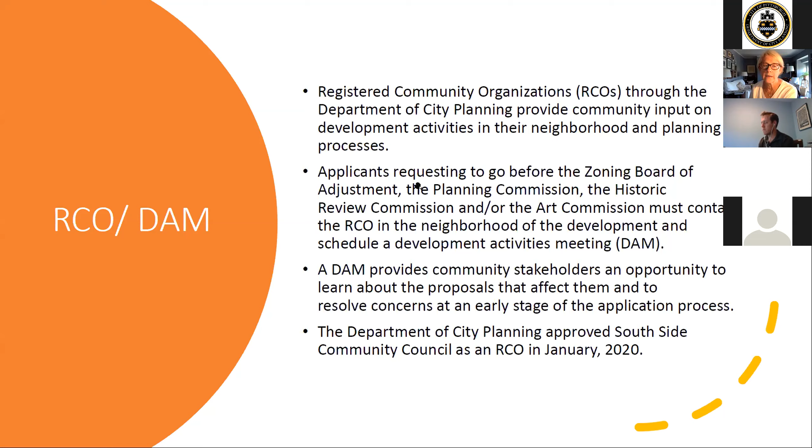Two of our city planners are with us today, Anthony Kobach, who will be documenting the meeting, and his colleague Stephanie Joy Everett, who is the meeting host. We'll hear from Stephanie a little later regarding the logistics. Anthony will now share when dams are necessary.

Thanks, Barbara. At the top it says a public hearing—it's one of the commission meetings, and in this case for these projects today, the Historic Review Commission, the Zoning Board of Adjustment, and the Planning Commission are the 3 types of public hearings that would trigger or require a development activity meeting. But it takes one more step: the public hearing plus one of the project thresholds.

You see the long list of potential developments that would trigger this. I want to at least take your eyes to the last 2, which is basically any project of any size or scale that is going to Historic Review Commission would also trigger a dam, as well as Art Commission.

But for the other projects and other commissions, you would actually have to have some sense of a significant size to the project. So very, very small projects would not trigger that, because the mindset is that these are smaller projects with less impact or significance in the neighborhood. But you'll see like 4 units or more residential units.

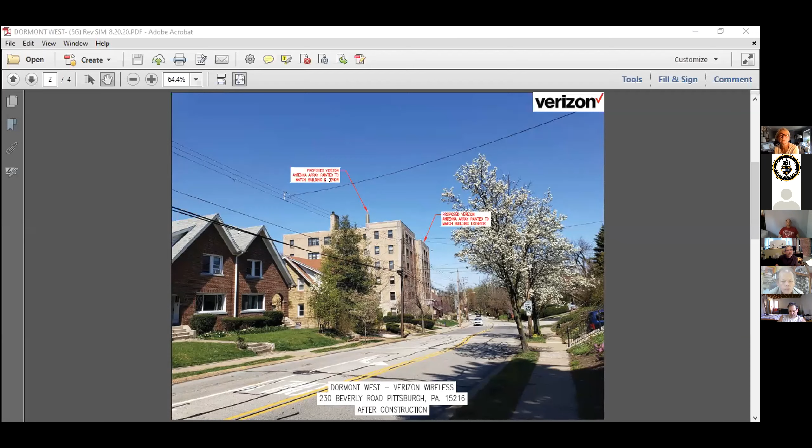And there you go. So this is the building that we're proposing on at 230 Beverly Road in Dormont. Actually, it's Mount Lebanon, it's Mount Lebanon borough or municipality of Mount Lebanon. This is the canister I was referring to. I could see if I can kind of blow that up a little bit, where it would kind of look just like a chimney, a stack of some sort sticking up out of the roof. There it is without it, and there it is with it. That's what we're going to be proposing for our rear sector on the building at 1700 Carson.

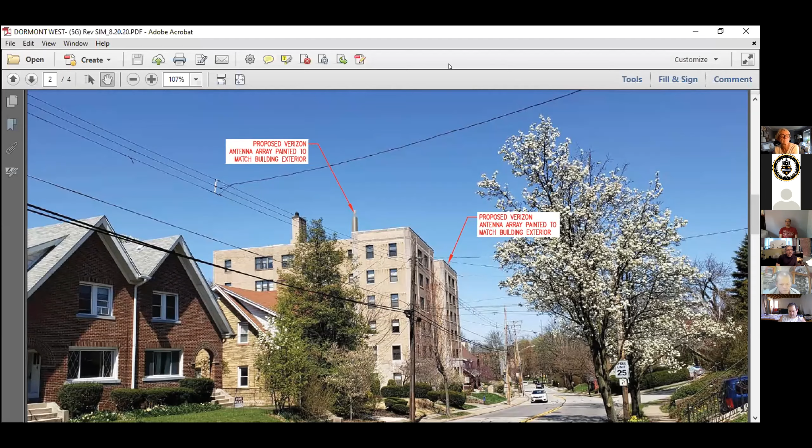So if anybody has any questions at this time, I'd be more than willing to answer anything that you guys would need. Barbara, I guess I'll kick it off to you first for questions. My only question, were there 3 sectors, or did you mention 3 sectors or 2? 3. There's going to be 2 in the front of the building going east and west on East Carson Street, and then the rear sector that's going to be enclosed inside the cylinder, shooting up to the south. Okay, thank you, that's it for me.

You put some more dimensions on it for us all. There's been some questions in the chat. Can you just give a plan dimension of the main area that's in the middle and a maximum height off the roof, finished roof? Yes, I'll share my screen again and I'll show those.

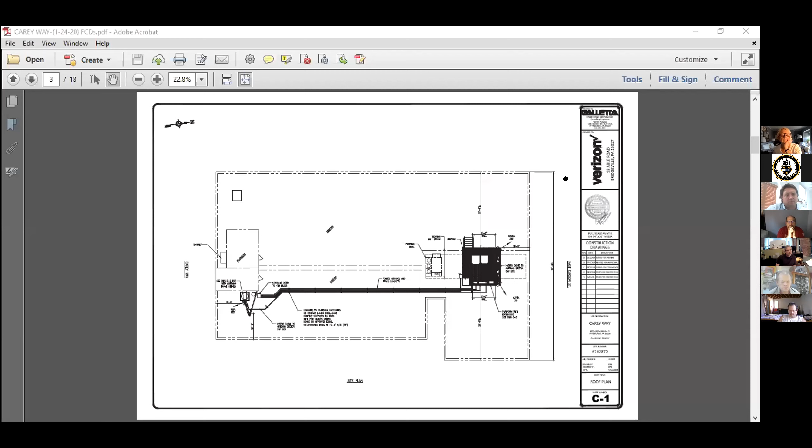We have an elevated drawing of the building. Looks like top of the parapet is 57 feet. The highest part, there's a chimney at 67 feet. Top of the antenna will be 65 feet, that's on the back one. What about the front one? Let's see. There. So the top of it looks like 8 feet above the parapet line right there, 8 feet to the top.

So probably from sidewalk level, you probably will never even see these from the sidewalk, just looking up. I mean, that's just an opinion, I'm not sure 100%. Like I said, even to get our photo sims, you could tell that we were very far back on the building just to see them, from the east and the west.

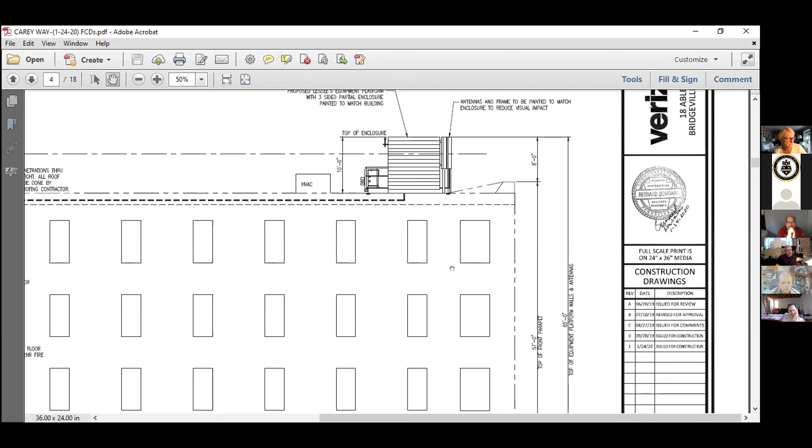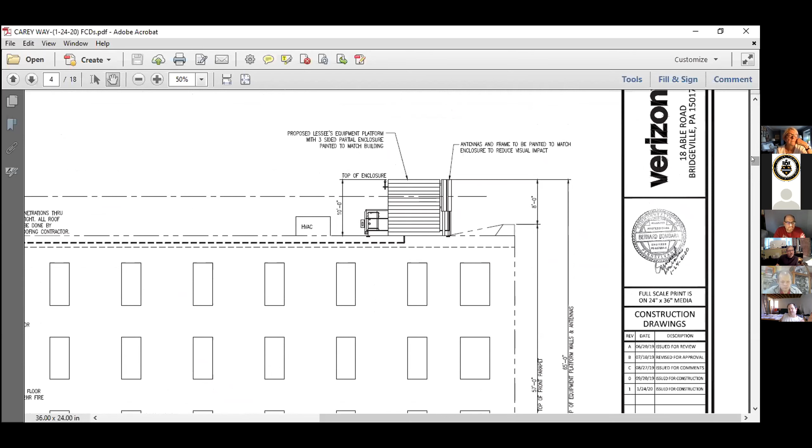Yeah, I was just concerned with across the street. The street is pretty wide there, and if I looked up, if I would see that sticking up. I don't know, I feel like you're going to see it from across the street at that height, at that setback. Is there anything with the technology in which you're using to locate it that you can't move it back another 4 or 5 feet, so that it's less likely to be seen from directly across the street when looking at the front of the building? Yeah, I can tell you that this was the location from an RF, radio frequency engineer, came up with, because we actually looked at all that, where can we go as far back.

We always want to make it less intrusive to anybody. But what happens is with the top of this roof being so long, we end up getting shading, and it would just shoot over the streets. If we move these back any farther, then we're just shooting more rooftop than we are actually getting out to where we need to be.

Also, is this unit replacing part of your existing infrastructure that's either on this building or another close by, or adding to the network? Are you getting rid of one somewhere else? No, it's just adding to the network. This is a capacity site.

If I'm not mistaken, Verizon already has a presence there on East Carson Street, but with technology and all the apps, on a Friday or Saturday night, you've got 1,000 people wanting to get Ubers and running Snapchat. The system is just getting overrun with more apps and data being run than the actual voice, talk, and text.

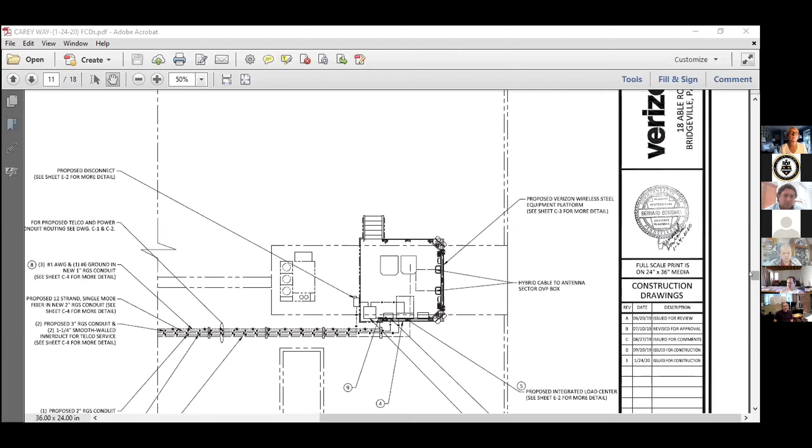The back antenna was at 65 feet, the parapet is at 55. So it's looking maybe 10 feet. The top of that rear antenna is 65, so a total of 10 feet.

And is this for 5G? No, it is not. It's a 4G capacity coverage site.

And then I think the last couple of comments or questions I'm going to read to you. It's our understanding that the PUC likes to group all of these towers together. We could have 8 of these things here. So could the canister be situated by the chimney on the top of the building? Let's show the chimney.

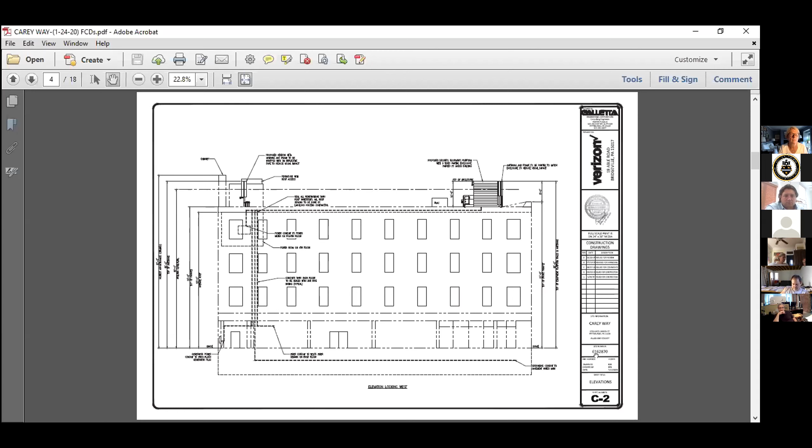So our question is, looking at line of sight, could your structure be in line with that so it doesn't become another addition to the height of the building throughout? I'm wondering if this is something you're seeing with the white structure, if it's the HVAC units or something along that.

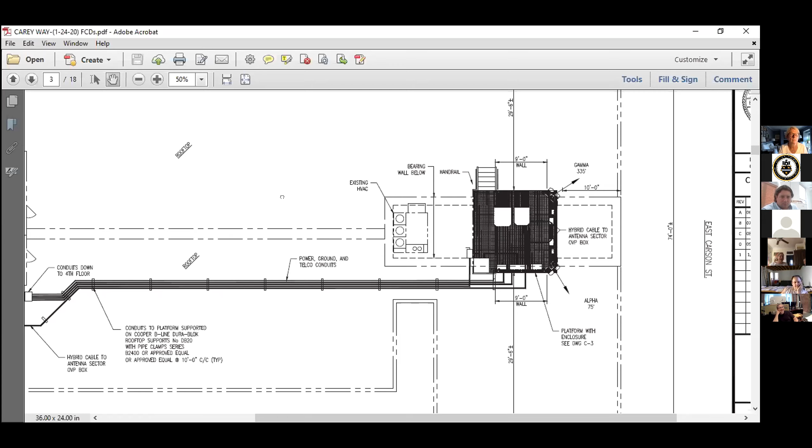It very could be the HVAC unit. You can't move that, that's on his computer. Move my picture, but I can't do that. Yeah, and then there was the penthouse, the access to it, and the existing chimney.

What I'm trying to prevent is the same thing that happened to Nakama with a whole series of buildings that actually end up raising the roof line another 8 feet.

I'm sure, and believe me, I cannot guarantee anything in this world of technology, but with all the major players already there across the street, I can't see why they would move from one building to the other, or why they would add another set of antennas right across the street. I can't see that ever happening.

But well, if they went to 5G, that would require new equipment, wouldn't it? They would just probably swap out and replace what they already had. They usually don't add, they would just maybe, if they ever would go to 5G here.

As of right now, the 5G technology isn't in these macro sites and these large antennas. 5G right now, they're going on the small cells on city street corners and on top of telephone poles and things of that nature. They don't have the technology yet to go on these kind of antennas in this kind of site.

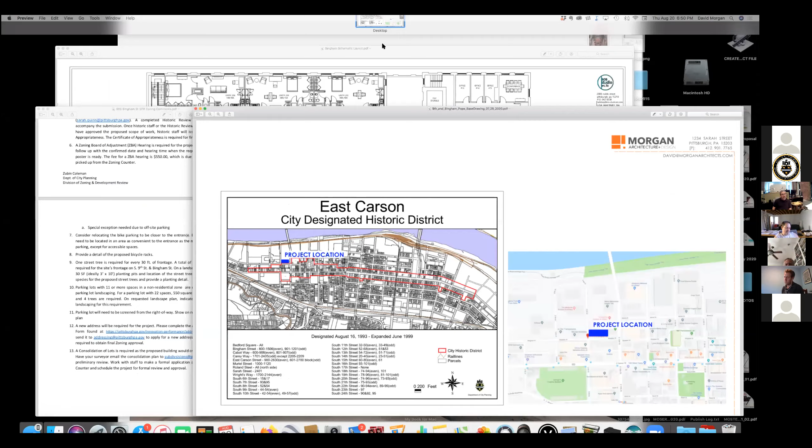Thank you very much, James. For those in attendance, additional comments can be shared with the Southside Community Council via email at info@southsidecommunitycouncil.org. We're not sure of the date it will go to the Historic Review Commission, but when it does, we'll let residents know so they can provide testimony at that meeting. I'll also share with you Anthony's report, and I'll touch base with the local review committee to see if there are any additional questions or concerns, so that can be shared at the Historic Review Commission meeting when it's scheduled.

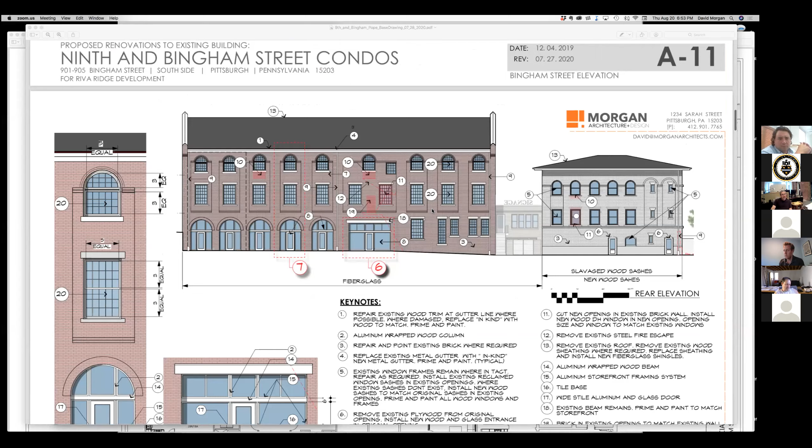Do you want me to begin, or is there an introduction to this? You're fine, you can begin. Okay, thank you. So my name is David Morgan. I am an architect with Morgan Architecture and Design. I'm presenting today the 9th and Bingham Street condominium project, or not necessarily condos, apartments. Things have changed over time with this, but I've been working on this project for a little over 20 years now, so the name has changed several times over that period.

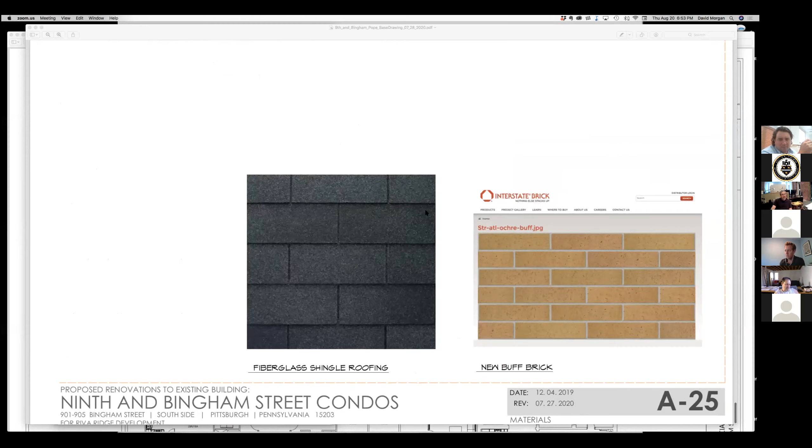But I think you would recognize the building - I have some photographs here. It is the old Mackintosh-Hemphill Foundry building. Those photographs aren't on here, but you can recognize it from the elevation on Bingham Street heading down Bingham Street away from 10th Street. So as I said, this building has been empty for more than 20 years now. I was hired when I was with my dad's firm back then to look at filling this building up and restoring it, and it's only now happening.

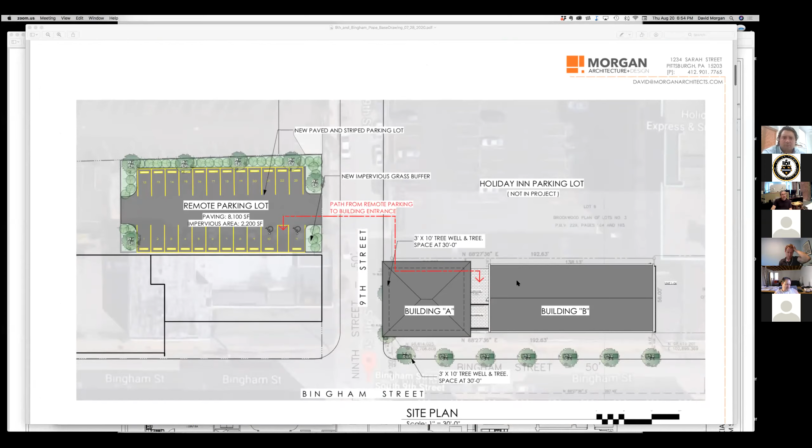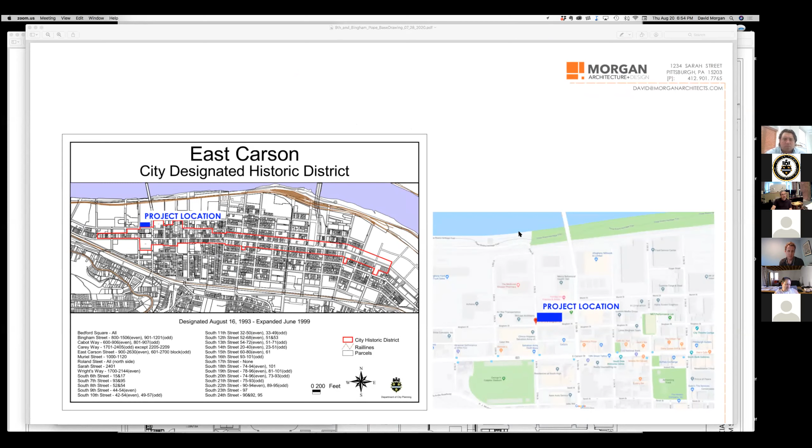So the drawings I'm going to show you right now are ones that have been presented at the Historic Review Commission over the course of 2 hearings and have been approved. I don't know that I've changed every note, so there may be a note or two that doesn't reflect the approval, but for the most part these have been submitted and approved by the Historic Review Commission. We're here for reasons other than the Historic Review Commission, though we submitted this back in January for approval, so that may be why we had this meeting in advance of coming to you guys. But regardless, we're here anyway, so we welcome any comments you have.

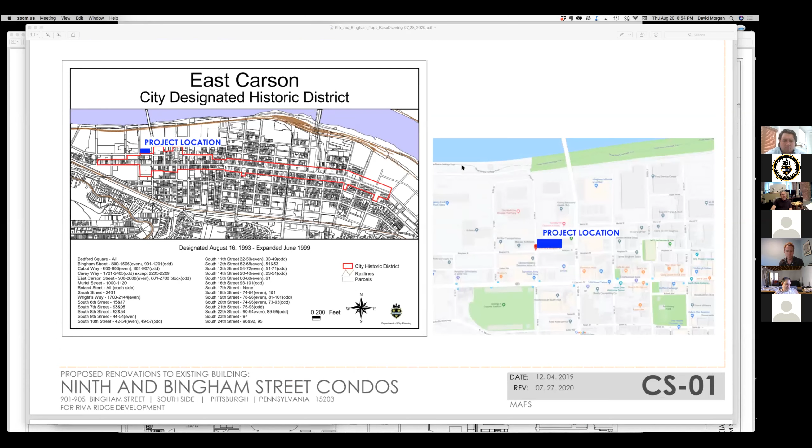I'll just start with the basics of this project, and I may turn it over to Chris, one of the owners, for his input coming up here in a little bit. But this is a site plan laid over top of a site photo, and it just gives you sort of the lay of the land of this project.

We've got two buildings on the site right now. I call this building A and building B for simplicity's sake. Building A was an office building. Building B was a pattern shop for an old steel fabrication mill, and then there were mill things going on here in this parking lot. This parking lot is the Holiday Inn parking lot behind the Holiday Inn on 10th Street. So this is Bingham Street and 9th Street.

So there are these two buildings. We are proposing a link between those two buildings that I'll show you. And we are also proposing renovating this parking lot here, which will also be part of this project. It is across the street, which is one of the reasons we're here, because this is off-site parking technically, since we're across the street here.

So this slide is essentially to show you the proximity of the proposed remote parking lot to the apartments. Paved area, about 8,100 square feet. Impervious area, about 2,200 square feet. That includes some solid, there's some building here that comes along with it as well.

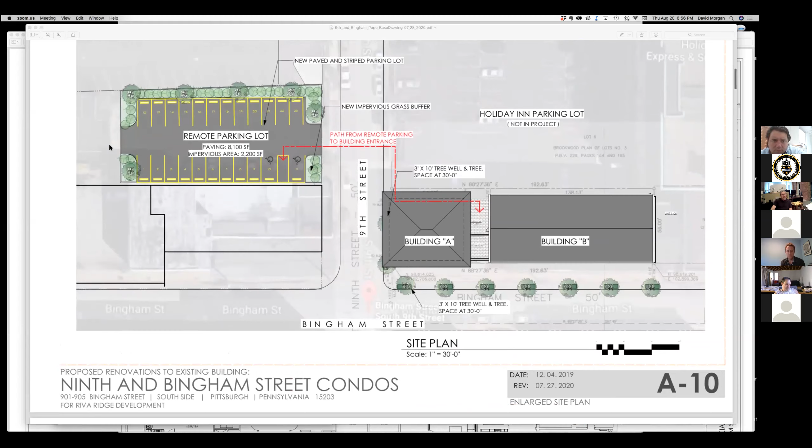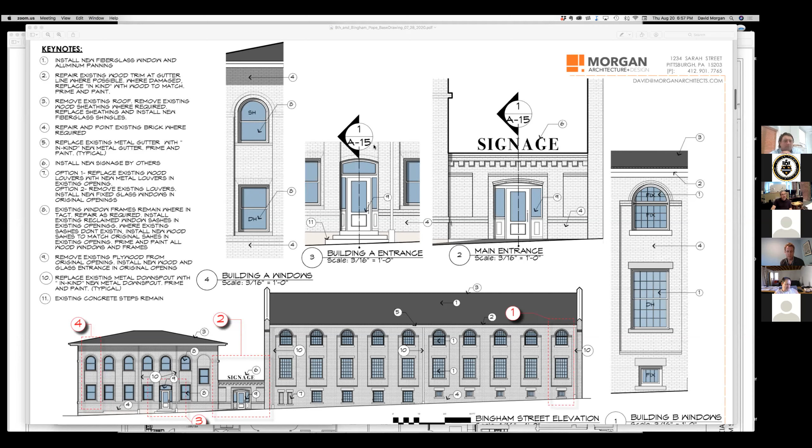This is some of the stuff we presented to the Historic Review Commission. So we are planning on, as much as humanly possible, restoring the building. If anyone has been down that way, you'll know that this building is in real desperate shape right now. Big hunks of the roof are missing, windows are missing. Most of the windows have been taken out and thrown away. And inside looks like a rainforest, with some pretty severe structural damage going on in there. So it's our intention to get in there, shore everything up, and make everything structurally sound so that we can put apartments in there.

On this facade, which is the primary facade, the Bingham Street facade, what we proposed to the HRC and what they approved was that in this building, building A, which is the small office building, we would find all of the existing windows that are still there. There's not a lot of them, but there may be 15 or so existing sashes in the building, sort of covered with tarps. We've committed to restoring those back to what they were and reinstalling them in the existing openings. Where those don't exist, we proposed installing new wood windows, setting new wood sashes within those frames. So this building A would have an entire wood window system in it, front, side, and rear.

On this building, we had originally asked to do all of this in wood and all of the rear in fiberglass, and we did get permission to do that back in February, or maybe January. But we went back to the commission after that and requested a change, because what we thought would make more sense is to treat building B, which was the Foundry building or the pattern shop, as one unit, so the front windows and the rear windows are the exact same material, and then to restore all of the windows in this building as I explained. So this building would have all wood windows, front, side, and rear, and this building would have fiberglass windows front and rear.

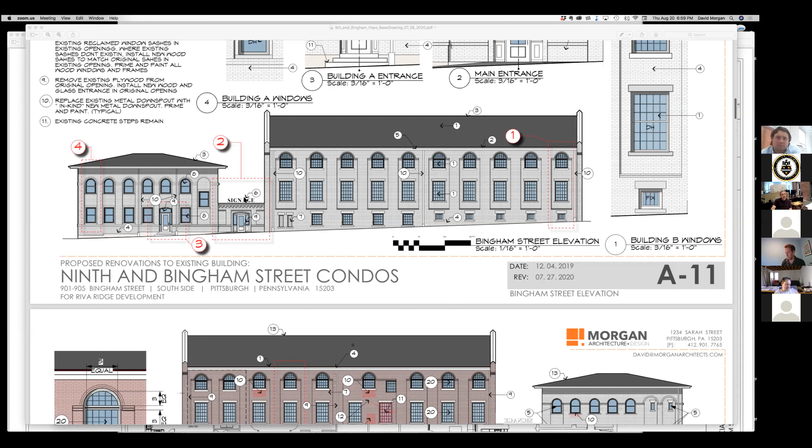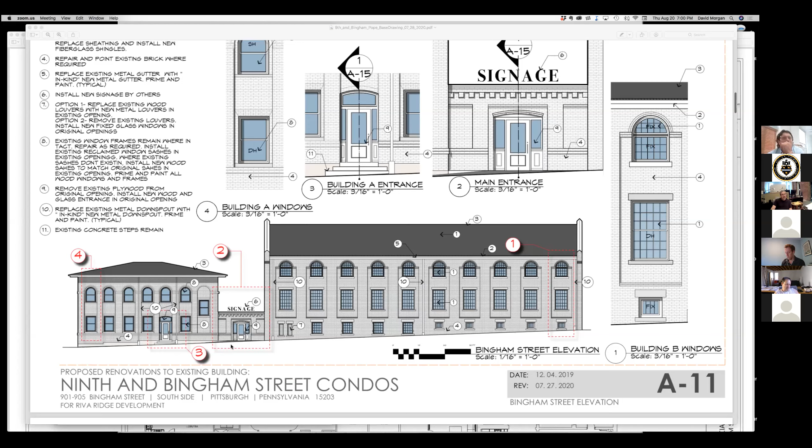There is a link between the two buildings, and that's what you see right here, looking at it in context with both of the buildings. What you see here is a brick wall that exists right now. The opening's covered in plywood, and it's just a wall—that's all that's there. So what we're doing is proposing to enclose behind this and install a new opening there to enter. Additionally, we'd have a new entrance to building A here on the Bingham side.

This is the rear elevation. I don't know how in depth you want me to go with this presentation in terms of pointing out every opening, or if you just want an overview and then you can ask questions.

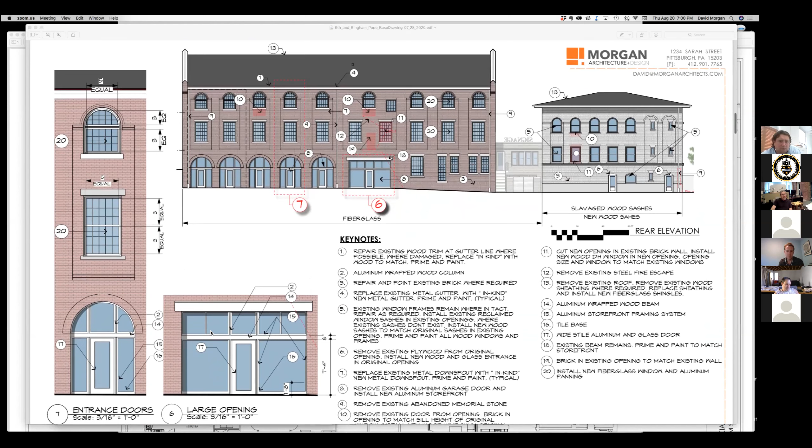Yeah, I would say, Dave, just an overview, and then if anyone has questions—because as you mentioned, the reason you're here is because of the off-site parking. Correct. Yep. And, yep. So yeah, I mean, I'll make these.

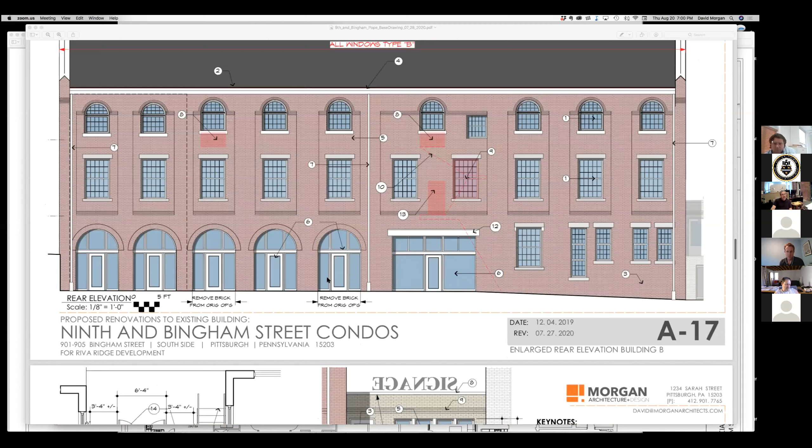I've emailed these out to Anthony, so he can—and to you, Barbara—so you can distribute these as you see fit. But this basically outlines all of the architectural work going on the site in this building, and the link.

So I guess there's not too much to say about the remote parking lot. Obviously, because it's remote, we do need to go in front of zoning. We are providing 23 parking spots on that site, repaving it, restriping it, and of course doing all of the landscaping around it as well.

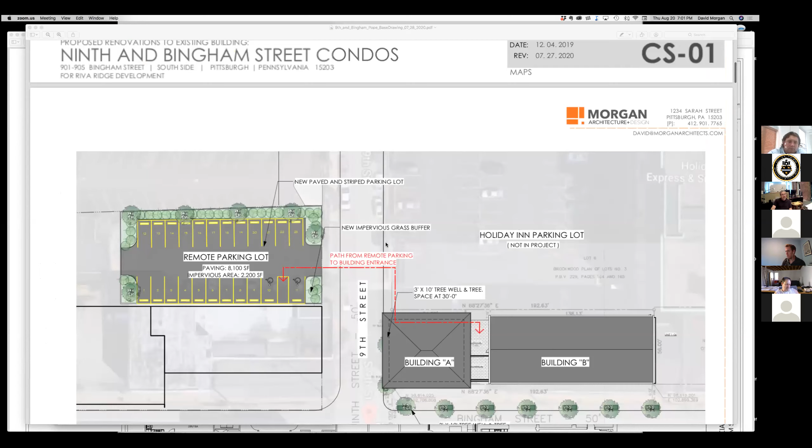And it is literally just across the street from the small building here. So I don't want to go on too much. I know you guys probably have a lot of questions, so maybe I'll turn it back to you for any questions. And then Chris can jump in to talk a little bit about the plan for the interior of the building, what the apartments will consist of.

If I could just ask one clarifying question before we get started. We're talking about the remote parking here. Can you tell me what the zoning district is there? What's the base district? And then just clarify, is that the only variance you required? Is it just a variance to have accessory parking, or do you need a use variance as well? Just what exactly are the variances that we're reviewing?

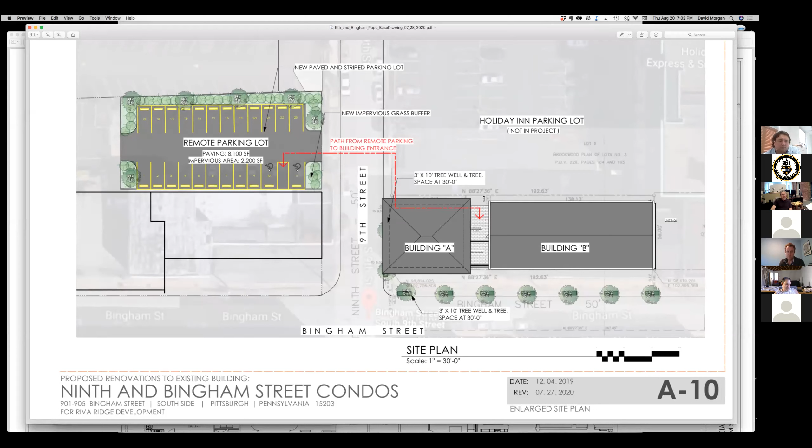So the only variance is the remote parking. There is a requirement - these are currently on two separate lots that need to be consolidated, and that process is going on right now as well. But that's not really a variance. The variance is the remote parking.

And I don't know whether, Anthony, you can jump in, since you reviewed this, if you have anything else you want to add. This is a change of use, but it's a by-right use in the current form, in the proposed form - is that what you're saying? Yes. I'm not technically zoning staff, I'm on the strategic planning side of things, but just confirming that the only variance, as it's worded, is a special exception needed due to off-site parking.

And I think, Barbara, on another topic - wasn't this project, it went before Historic Review Commission before Southside Community Council became an RCO too, so that was the other technicality, and it didn't come back. The local review committee has worked with Dave on the work, so they shared their input at the Historic Review Commission meeting.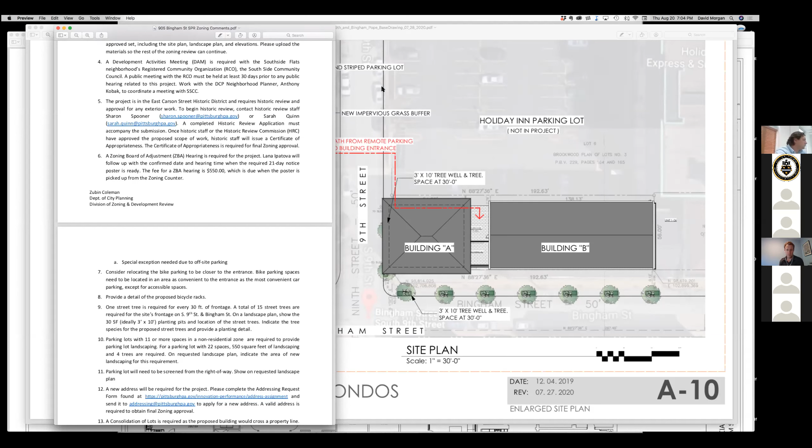Correct. Yeah, so I think a question is, you've indicated how many spots there are - 23. How many apartments are in the apartment building? I'm going to let Chris go ahead and talk a little bit about the interior. I'm actually not the architect for the interior layout of the building, I'm the exterior architect, so Chris can jump in here.

Is he still on? Yes, I'm on. There are 17 apartments, all of which are studios and one-bedroom apartments.

I thought I saw a 2-bedroom in your plans. Did I not, or was that removed? If there's a 2-bedroom down there, bottom left, that would be news to me. Okay, I do see that. There is one 2-bedroom apartment in the bottom left floor. I apologize for that.

Actually, that has been changed because the stairwell in the basement actually egresses out the rear. So that bedroom there is gone - that's why it is just a 1-bedroom apartment down there. That stairwell continues out the back side of the building, not the front side.

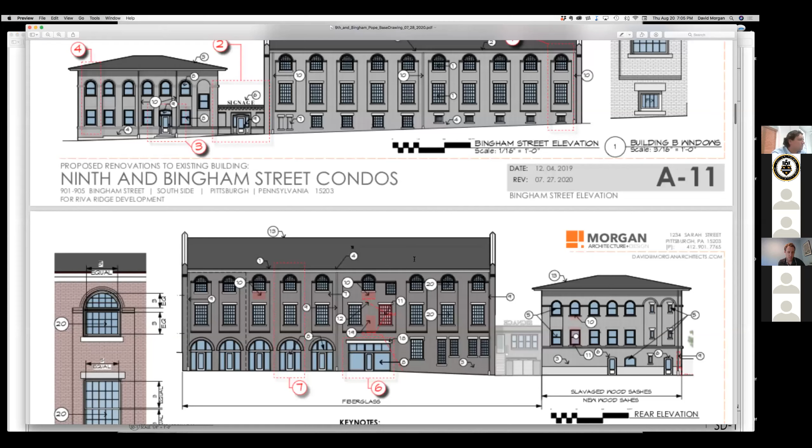And we did that for clarification because we did not want to have - and I know HRC didn't want us to have - a door cut in here on Bingham Street that would be an exit from a fire stair. So what we're doing is using this door opening for that exit from the fire stair. It's on the back and tucked far back in the corner, so we're able to maintain the rhythm of that elevation.

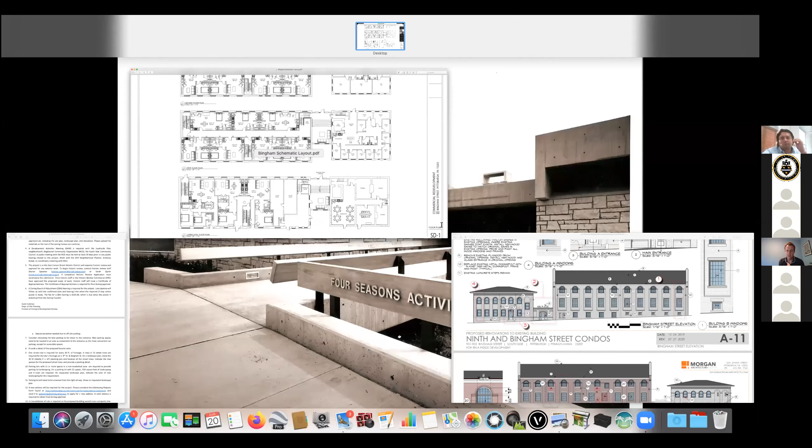And then what does a person do when they exit? Is there a walkway on the site all the way along the back there? I know it's very tight, maybe 10 feet or less. Yeah, there's 10 feet, it's a sidewalk and it actually will be handicap accessible back there.

Is that fence - are you putting up a new partition between you and the neighbor? Yeah, we're working with the Holiday Inn right now to come up with what type of fencing we're putting in there.

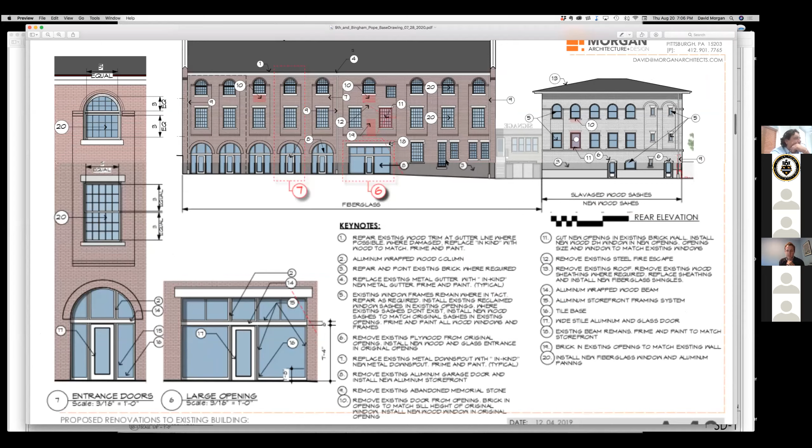I guess one question we always ask is about where trash is. So the plan right now, per David's plans, is to have the dumpster in the rear courtyard behind the link between the buildings.

However, that area might need to be used for air conditioning condensers. If that is the case, we will have canisters in that location, and then we will have a dumpster over in the parking lot that can be emptied multiple times a week.

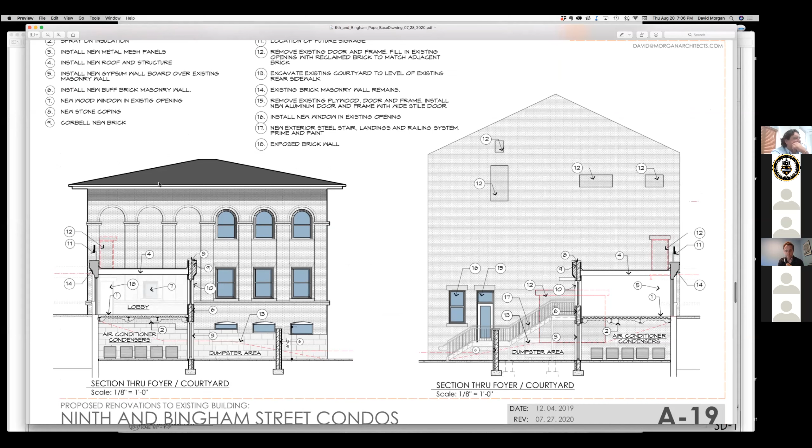So does the reduced parking count put you below your required count? This is Riverfront, RIV, and we have at least 1 parking spot per apartment, which more than covers us. The remote parking lot is a separate parcel, but same ownership. We purchased both, so it is all under one ownership group.

In the RIV, don't we need stormwater retention and stuff like that on an open parking lot now? Has that all been addressed in your design? David, maybe you can speak to that. I don't think it has been addressed yet, but it will be. We will be meeting those requirements. We're right now in what I would call the entitlement phase, going through the HRC and zoning to make sure this is correct. We're not looking for any variances on that. We would provide everything required.

I'm just wondering about buildings A and B, how are we going to deal with stormwater? There is no addition to impervious area with buildings A and B. Those roofs are there, and the center part is all concrete now. This is a concrete walkway. It's in terrible shape, but it is currently all concrete.

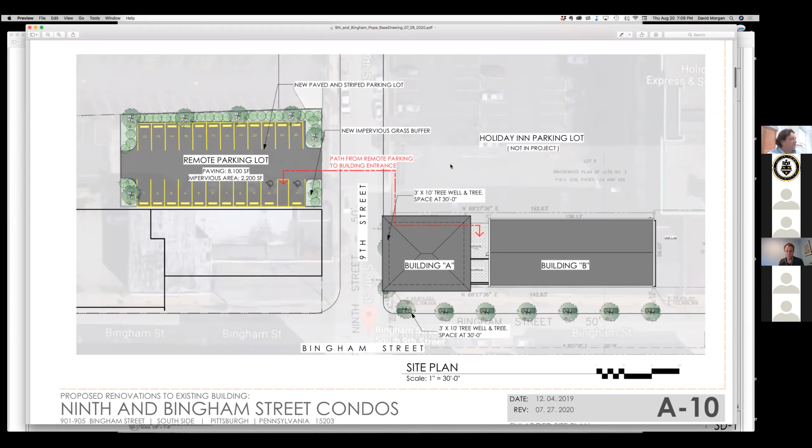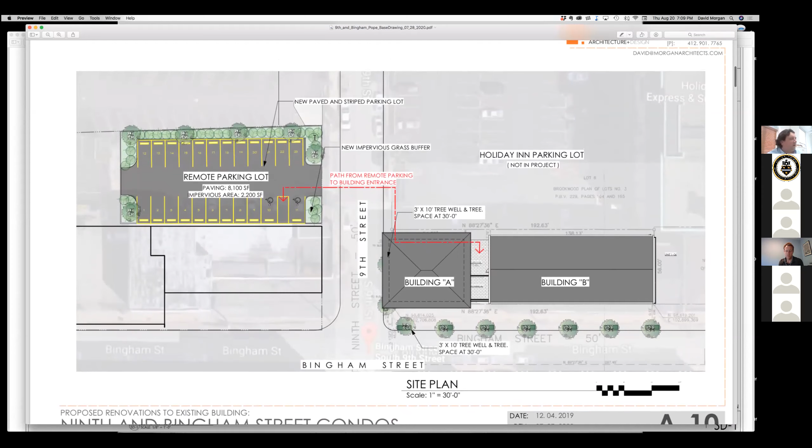Sure. Can I ask? I'm looking now at Google Earth, seeing what this looks like. Can you describe - directly across 9th Street on Bingham is a white building with limited parking on Bingham Street, and it looks like a warehouse. Yes. Then behind that, there's an asphalt parking lot with loading dock bays that exit onto it. Beyond that, there is a paved parking lot with landscaping. Where is your proposed parking lot?

So this that I'm outlining with my cursor is the building you're looking at, the warehouse building. Directly behind it is the parcel that comes with this warehouse building. The parking you see beyond here, in this sea of parking, is not part of this project - it's not owned by Chris. I believe Mercy Behavioral Health owns that, or someone else. Yeah, it's UPMC.

So then my question is, Chris, do you own the white building? Yes, we do. But what's the plan there, because I'm looking at loading docks that exit onto where you're planning the landscaped parking. Is the white building vacant, is it being used? It's half vacant, half occupied - currently half is occupied by the Western PA Conservancy. We are going to be using what we need for our parking in order to get our approval, and at that point the white building can be vacant, used for storage, that kind of thing.

Okay, the other question I have - you said this is in the RIV, and there's 17 units. Do you need a variance from their maximum parking? No, the variance is just because it's off-site, it has nothing to do with the number of spots. It's only because it is across the street and not on the same parcel. I thought the RIV capped it at one space per unit, am I incorrect?

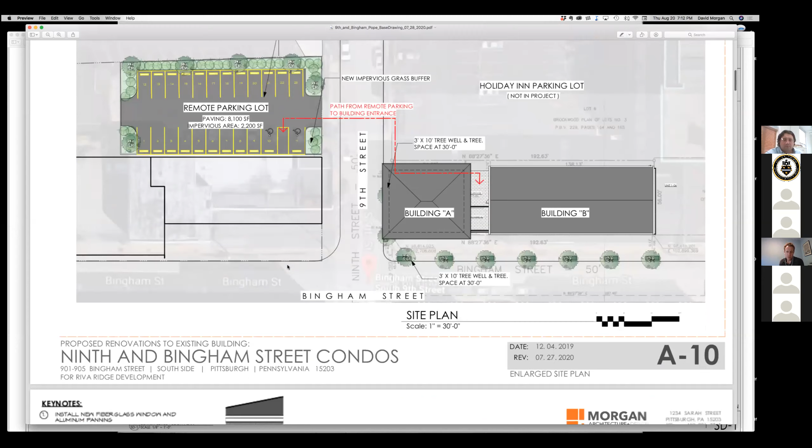So I would have to get back to you on that. Does building A need parking as well? Could that not be utilized for that as well, or do you have other arrangements? Oh, that could be the case, Chris. Building A is office space, and so that may be the case, that there's parking for building A, which is office space, and building B, which is the apartments.

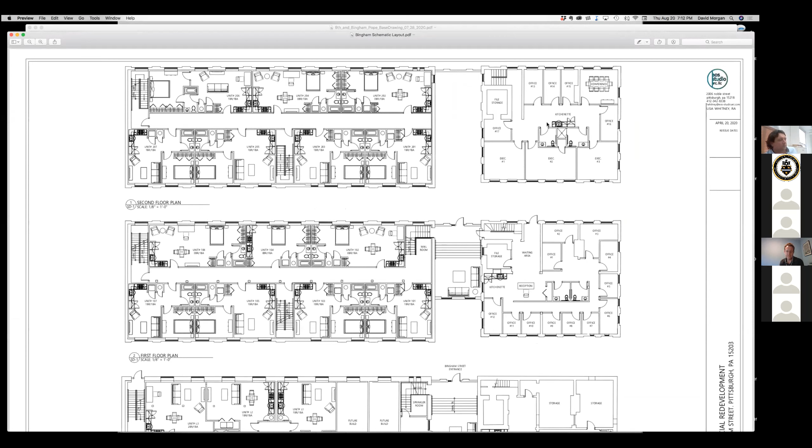Yes, Stephanie, I'm not sure if you know that, but again, we're both on the planning side. But with the applicants, Matt, working with the zoning division, I'm sure that they're at least getting advised. My understanding is that any off-site, so to speak, parking lot is what you're asking for approval of. It's not the number of spaces. During the actual permit review before the zoning division gives out, I think it's called a ROSA, it's an approval for zoning, it would meet the code.

So I do think that the RIV was forward thinking in that it doesn't want a lot of parking on our riverfronts. So I don't know if there's a parking maximum, but there could be. I just don't know the code offhand, but I can tell you that it will meet the code before it's approved. But what's actually being requested is to have an off-site parking lot.

Okay, and I don't want to beat this to death, but not only do I think that there's a maximum for parking in the RIV, but I also believe that there's a maximum size for a surface lot. And I understand that there's a lot here, but because of the garage bays and things, I don't know that what you're planning there would be encompassed in the existing parking footprint. So I think you have to be careful, because the RIV has a maximum size for surface lots in its zoning provisions as well. I'm not trying to say - I'm just trying to make sure we're looking at the right variances.

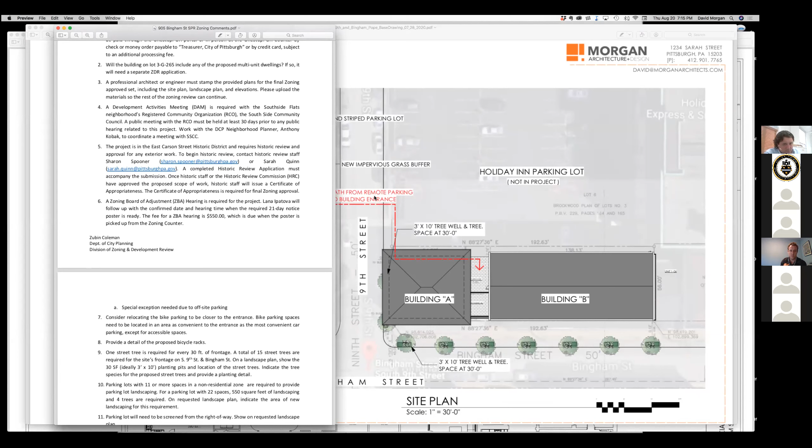If I can interject, it's Anthony again, not to keep beating the horse, Matt, but the other thing to also clarify, and Barbara and I talked about this at the outset, before the meeting, with the applicability slide, that in particular this project is, it's here, it's part of the public meeting, and then that threshold doesn't get into that particular variance. The trigger is the scale of this project, the scale being 4+ units.

So thanks to the presenters, I mean, you're presenting the whole project. So yeah, we're focusing in on the parking lot a little bit, which is fine, but it's really that whole scale of the project that is being brought to the DAM as well. When this ends, the applicant does go before ZBA, of course, for this particular piece. But my understanding would be if they only had 3 units and needed a public hearing, this DAM would not be triggered. It's the scale of it, not so much that specific variance.

Does that make sense, Matt, or to everyone? Mm-hmm. Okay.

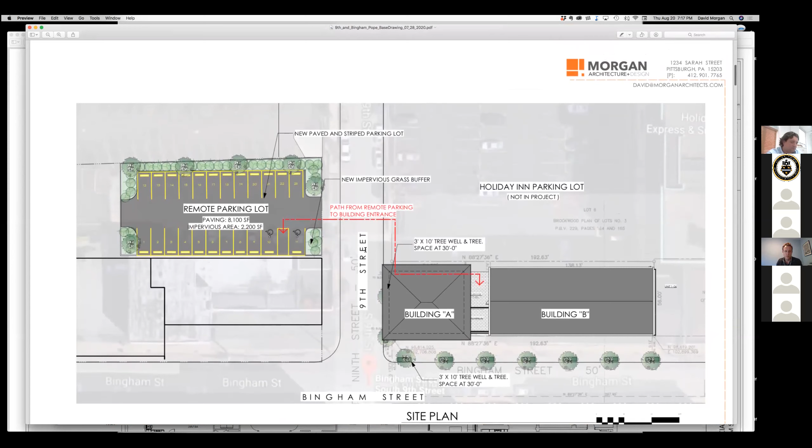Okay, first of all, I'm very happy to see that something's going to be done with these two buildings. We walk by there quite a lot and always have wondered for years why nobody's taken advantage of them. And that leads me to these buildings being so old. My guess would be that they have a lot of asbestos inside. Is that some issue that you have to remove all that?

No, it isn't, because there's almost nothing inside. There's no plaster on the walls, at least in Building B, which would have been the one that would have been of the age potentially that would have had some asbestos in the plaster. Now, that being said, I'm sure that there'll be some tests done before all is said and done, and if there is any, there might be some ancillary tile somewhere in a bathroom that was added later.

What about utilities? I know steam is always insulated, and a lot of times water lines are insulated. I guess back in those days they would have used asbestos. Yeah, they've actually already removed all of the old HVAC system, and the only plumbing that we found is actually buried in the brick wall with no insulation on it.

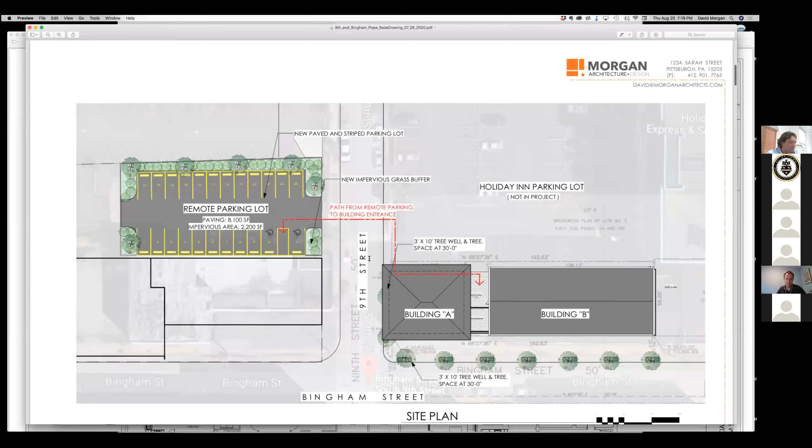Barbara, if you'd like to go over that. Yeah, so again, as Anthony mentioned, we have 30 days to review this. And if anyone has any additional comments, they can always email us at info@southsidecommunitycouncil.org.

We'll let you know when the zoning hearing is, because again, you can also continue to make public comment either by attending the meeting or sending testimony.

So I'd like to echo what Mike said, that I know that Dave, you're happy to see something happen to the building, and so are we. So we look forward to seeing next steps.

Great, well, thank you very much. Thank you very much for your time.

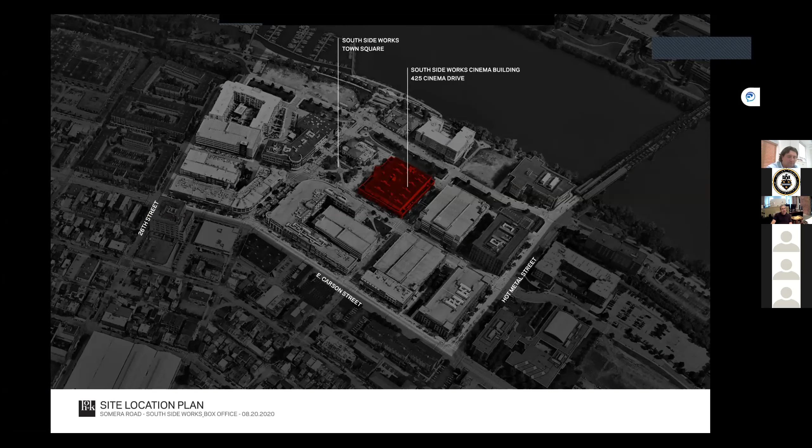Looking first we'll walk through a series of floor plans. The ground floor, the existing retail spaces are maintained with no modification as part of this scope, leaving that space as an asset to the community.

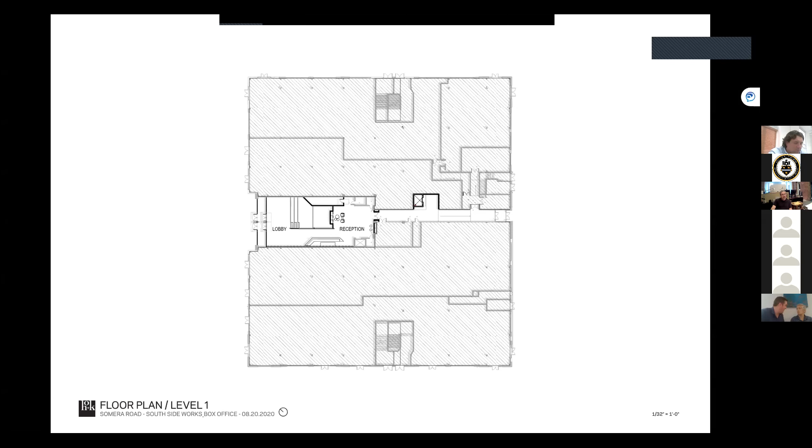We are looking at modifications to create a lobby space, again in the same area where the theater lobby once was. Exterior modifications at that level are limited to pulling out the old box office itself and replacing it with more open glassy front doors that help with transparency and security for office tenants. We'd also be doing a handful of interior renovations to prepare this for an office user.

The upper levels on the second floor, in terms of the interior, we are leveraging that the theater in its original construction was built upon a flat slab. So removing theater risers to seat is a fairly straightforward process, not the traditional cast-in-place concrete. For the most part, the second floor is completely opened up to maximize its flexibility, marketability, and usability for a modern office user.

The main feature on the exterior, which I'll show shortly in the renderings and elevations, is that we are removing a lot of the infill corrugated metal panels that once existed and replacing that with a clear glass curtain wall system, again making it applicable for an office user.

We are introducing two new patios on the northwest side of this, overlooking the town square and the Cheesecake Factory property. These patios, each about 1,600 square feet, really help enliven the streetscape and give it some vertical height. A major amenity for any office user would be this, with spectacular views, really helping the building feel more welcoming.

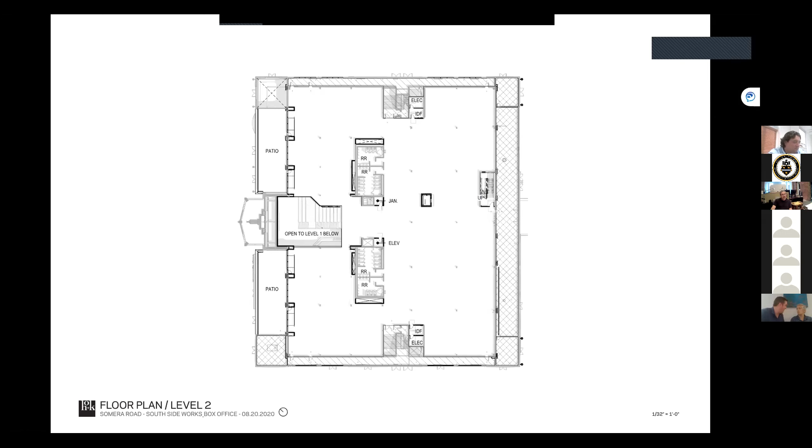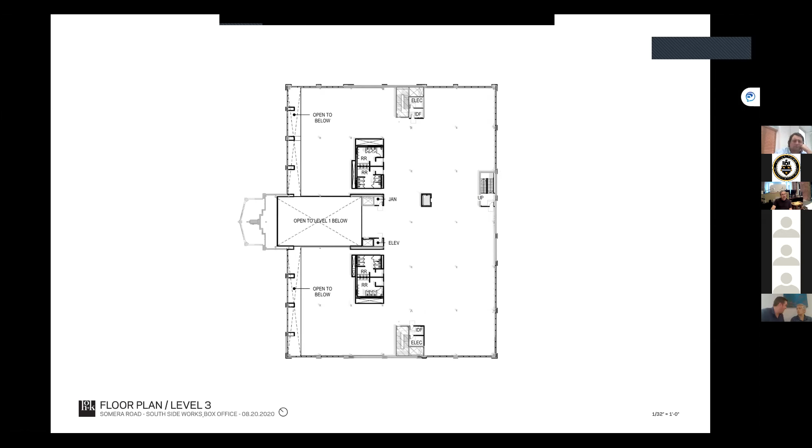The next major modification is adding a third interior level. This is not adding any additional height or modifying the exterior of the building. We are essentially expanding the existing projection level of the building out to the perimeter, so it won't really be seen from the outside. It just provides additional rentable and usable floor area for an office tenant, including bringing up this area to building codes, extending the fire stairs, elevators, and other uses to make sure it's ready to meet code requirements for a modern office user.

Beginning to walk through the elevations, what's shaded back in light gray is all existing. The pedestrian scale ground level remains essentially untouched. Our modifications are removing some of the existing high parapets here that hid previous mechanical units. We are lowering those parapets and replacing them with a glass handrail to create those new terraces, which happens only on the northwest facade.

We then are keeping the existing framing in place, however cladding it with a new metal panel. It currently is an EIFS structure, and we are modernizing that, trying to create a better design dialogue between the existing brick at the lower level and a more compelling facade with these metal panels. The existing corrugated metal panels are removed and replaced with curtain wall glass, as you can see here.

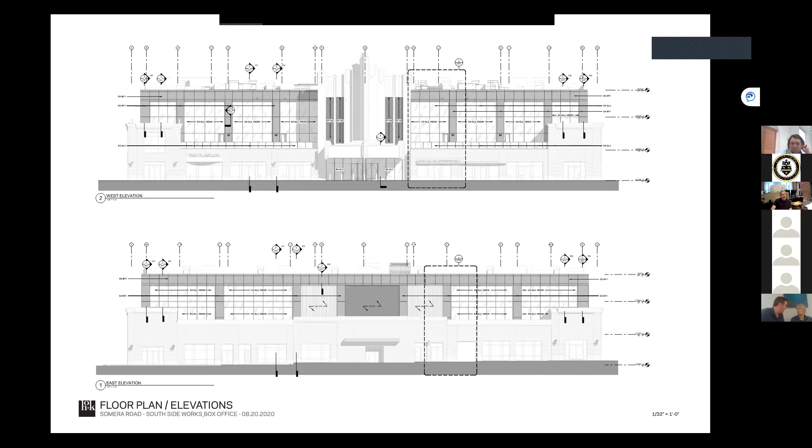This west elevation is on top, and the east elevation is down below. This is the elevation that faces the existing parking garage across 28th Street. Similar application here as well, though we are leaving a few of the metal panels in place due to fire stairs and building service elements behind them.

Looking at the north and south elevations, again a very similar approach here. In addition to the new cladding on the second and third levels, we are looking at punching out new windows on the second level within the existing brick. These would align and match in style and aesthetic to the windows directly below them, breaking up the longer facades that once had proposed signboards, providing visual interest and a visual breakdown of the facade, while also maximizing light and quality of space for an office user.

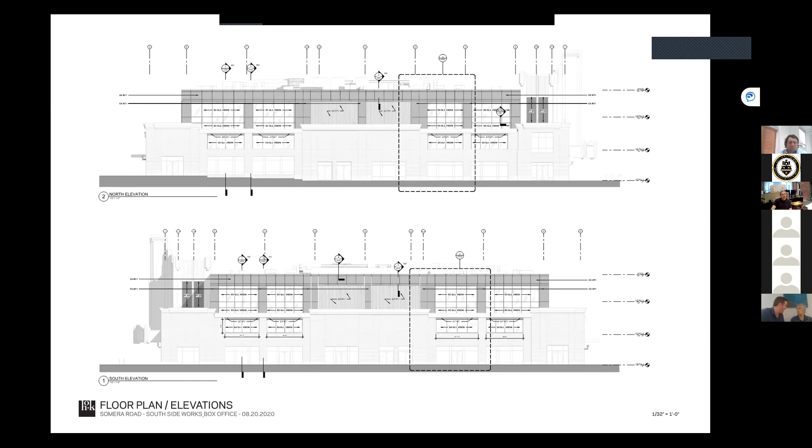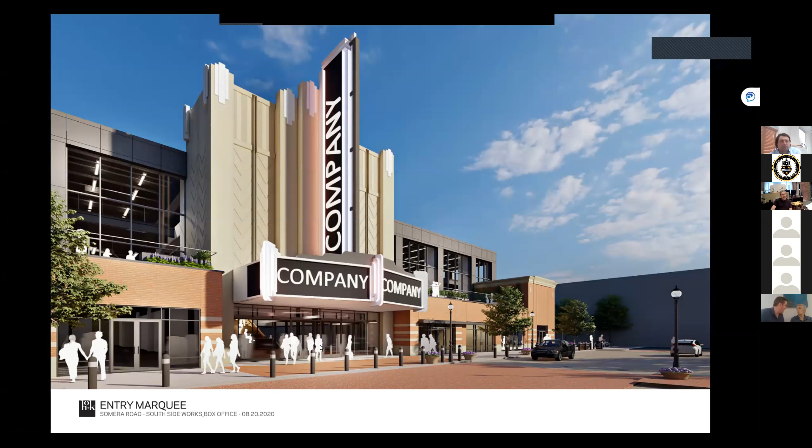Stepping down into the Cinema Drive view, we like how this actually provides some more depth by using a darker panel on these upper levels. We think that provides some nice contrast, and also references some of the metal panels of the surrounding buildings. We feel like this creates a harmonious structure between the brick, the stucco, and the icon of the sign, as well as the modern office component.

Stepping inside, I just have a few interior renderings for reference. Again, we're looking at this to really market towards creative class - a really interesting office space, a really good story to tell about. This used to be a theater, so the escalators and stairs are gone, but replaced with

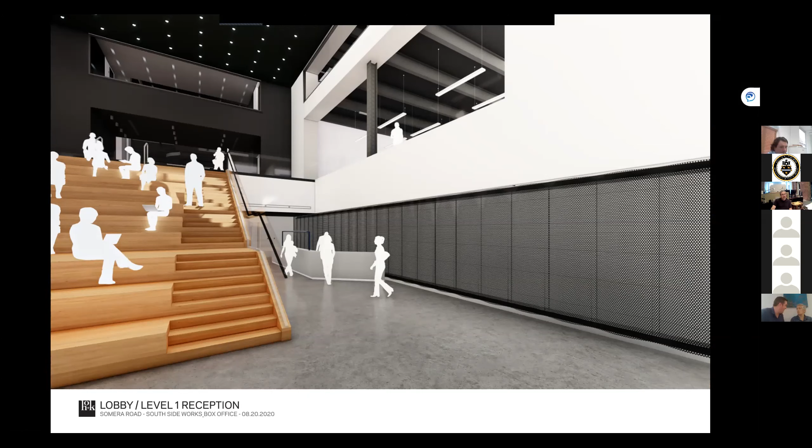theater seating, so this can become a town hall for any sort of office user. The metal panels here in the interior are ribbed to reference back to the old theater curtains, still paying homage to the history of the last 20 years of this building, but making it very applicable to a modern office user.

Really, where we're locating the doors is about where the old box office was. So a similar approach, but just modernized for the security needs, the vestibule sizing, those sorts of components that are necessary for an office.

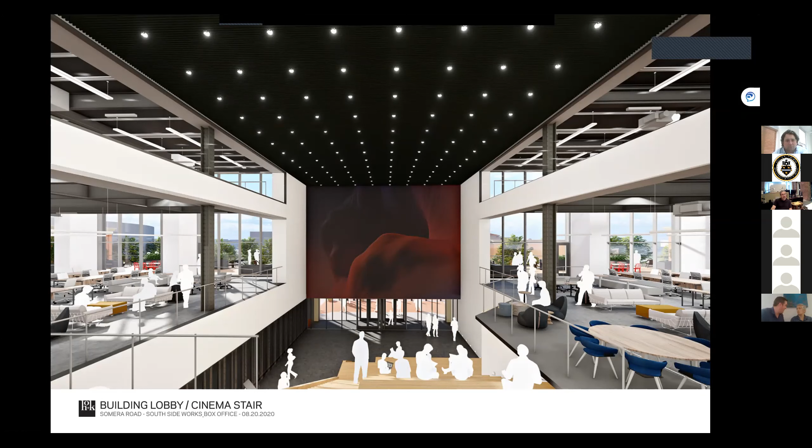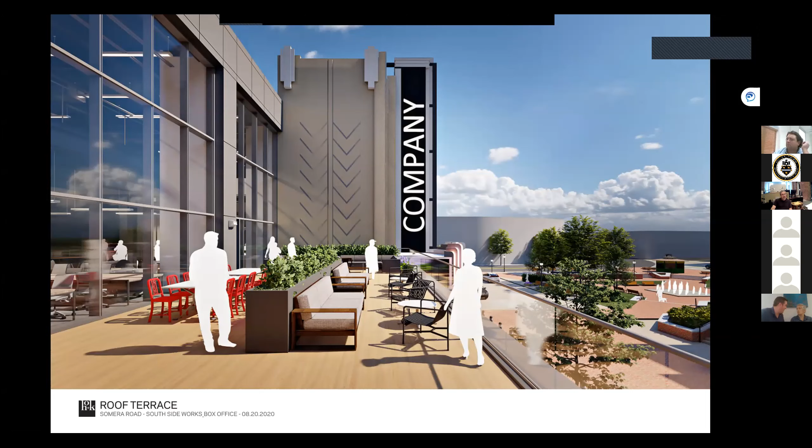This is a good overall shot that shows the proposed work up on these levels. So again, new glass where the current corrugated panels were, cladding the previous cream colored stucco and EIFS material here, in a modern painted aluminum panel here, and then the new terraces as well.

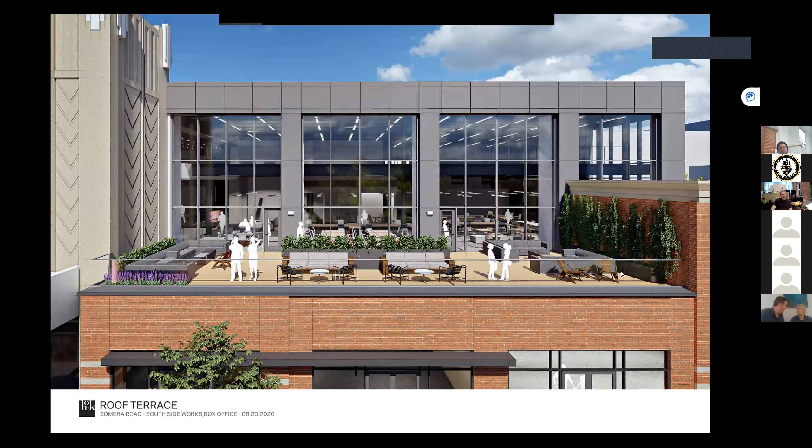So that's the high level overview, the overall summary. A few metrics on the project: it's maintaining its existing size of building. We are increasing the interior area by adding that third level, and so that is adding about 30,000 square feet to this building, bringing it up to about a 75,000 square foot office space, not including the retail on the ground floor. The building's height and positioning, and landscape, are not being modified as part of this scope.

Any questions? So may I start?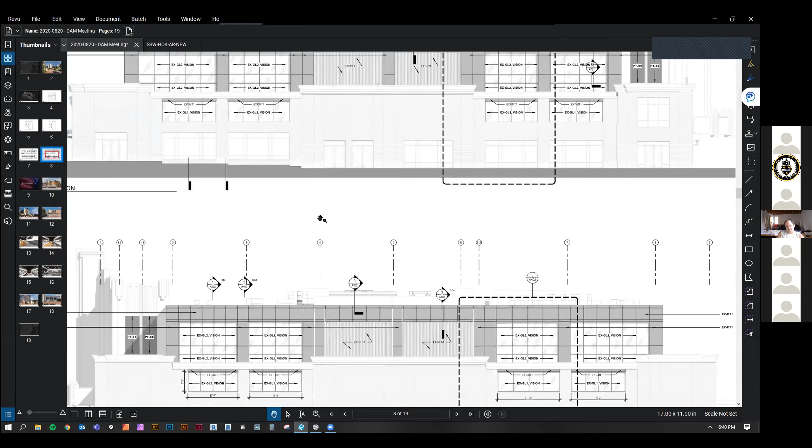Yeah, Michael, this is Chris from HOK. I can speak to that really quick. Eric, I don't know if you want to bring up those sections—one thing we did, we had a lot of individual rooftop units on the roof for the existing building. We've actually gone to 2 larger packaged units, and we've removed several of the smaller ones. So what we did was try to isolate those to the very center of the roof. And then you can see in the section Eric's pulling up here, we did some sightline studies for the city that indicated you would have to be a significant distance away from the building to see those units. We were pretty conscious of that going into the design with our mechanical engineer, just making sure they were as low to the roof as they could be.

You know, in our minds, we've covered that issue pretty well.

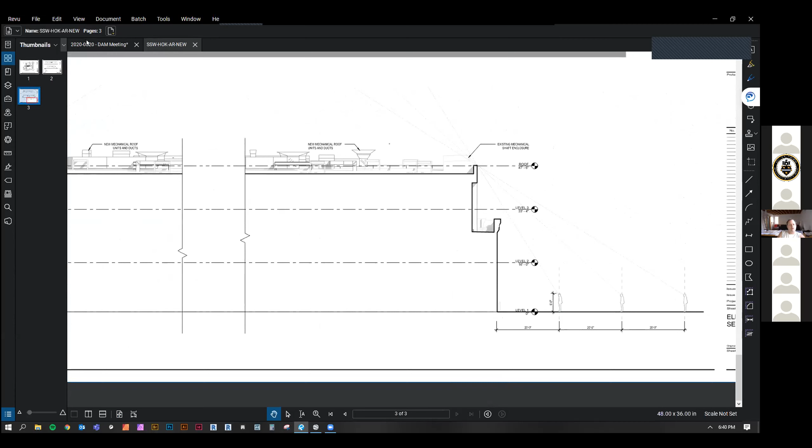Yeah, and just to add on that, Chris, in our renderings you can see one of the units way back there just starting to peek up. So in all these renderings, all the mechanical equipment on the roof is actually turned on, again for us to have sightline studies, so you can see how the parapet height in relationship to where we're placing the unit has hopefully proven successful in most cases.

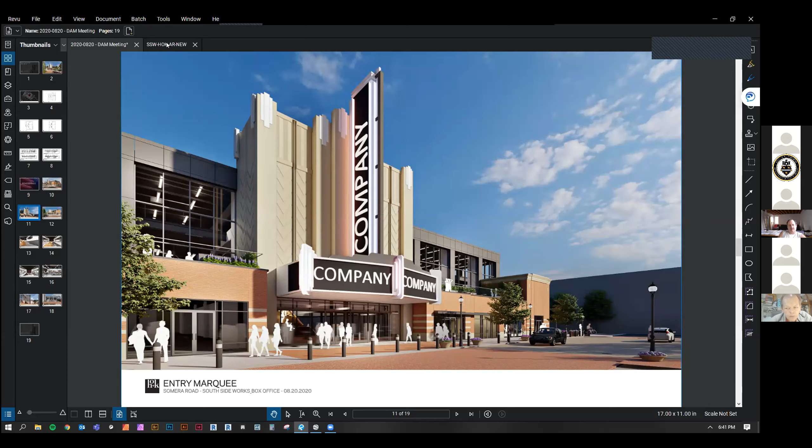Yeah, I just don't want to sit in the park, the new park or whatever you want to call it, there in the middle and see the unit poke up. So your renderings are a bit short, you know what I mean? If they're 50 feet back further, I would, but it looks like they're far enough, or at least as far as you can go.

So that's good. The other thing is trash and recycling. This building was built and designed a long time ago before recycling was mandated. I know it just has a compactor room in the back. Are you making provisions for recycling for the new business office? I'm sure it's going to have more trash than probably from before from the theaters. And then in the same vein, is there a bicycle storage room indoor for this tenant? How are you going to handle that? Because that'll be probably a need and an attraction for a client like that.

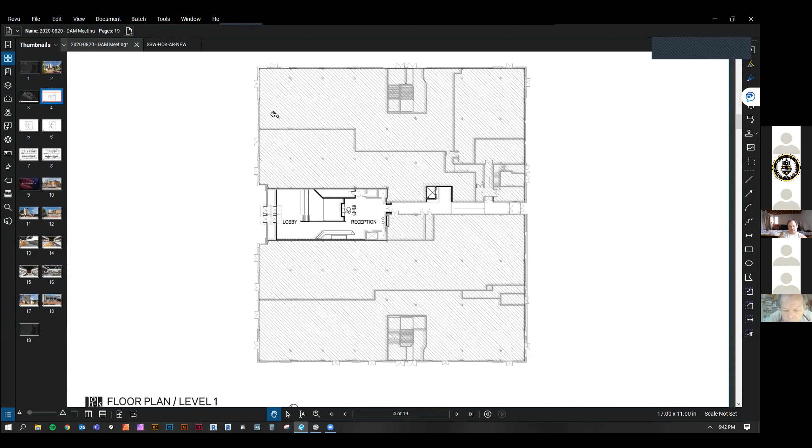I had a couple questions further on the roof units. You said that you had done some sight line studies. Were any of them done from the surrounding hillsides looking down on the site from the south end of the area? No, all the sightline studies that we did were taken from about, I believe, 60 to 75 feet from the building at grade elevation. Because in the original designs of these buildings, that was one of the concerns, the look down from the south side slope areas on the rooftop accessories.

And also, you mentioned that you essentially upsized the units and took out some of the smaller units. Does that increase any of the noise values at ground level? I'm assuming unless those units are less in noise with regard to newer improved machinery.

Martin, this is Chris again from HOK. I may need to get back to you on that with my mechanical engineer. I can imagine the newer units would be quieter, they're more efficient units. The reason we did that was really to make sure we were covering the amount of zoning we would need in an office environment versus what they had for a theater environment. So we could definitely respond to that, but that's a little bit out of my expertise as to how loud those particular units would be. And typically with the larger units too, we run them at a slower velocity, which typically means less noise as well, to kind of hit their optimum efficiency.

And in terms of screening, it's always extremely difficult to screen rooftops from an aerial perspective, because unless you enclose them completely with a roof trellis or something like that, which actually reduces the performance of the units, it's hard to screen them. So our hope is, yes, we have larger, more centralized units, but that also means less things on the roof as well. So it is kind of the thought that let's organize, let's make there be a strategy as much as possible on the roof to hopefully reduce the cluttered ad hoc kind of feel that might be visible.

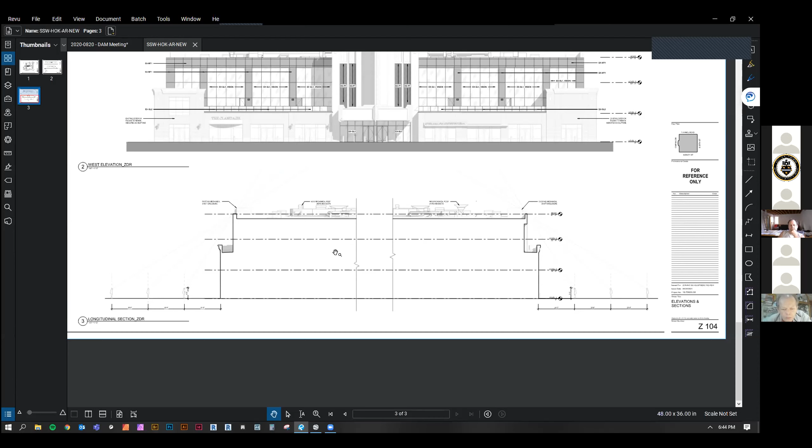Barbara and Stephanie, if we could go back to the one question Mike had, I thought he wanted an answer for the recycling and the bike racks, or was that rhetorical? No, it was. I was asking, I think the room that's there now is just a compactor, right? Is it sufficient? Have you looked at increasing it in size and footprint?

Yeah, I was going to answer that, Michael. I apologize. No, we did not look at increasing that room in size and footprint. We had deemed it sufficient for what we were going to be putting on it in terms of trash load currently, so we have not planned any additional modifications to that trash room. Because that room doesn't have any recycling provisions, which the city mandates, so I guess how will you handle recycling as part of the business?

Paper, for instance, is required by the city to be recycled. We have other trash locations on site, so our janitorial would use those locations. And then a bike room? And the bike rack, yeah.

On the bike rack, the URA garages there have bike racks within them that are covered. I totally agree with you, it's a great amenity, and I think any tenant taking this space is taking it to attract talent, theoretically younger talent. So I agree with you, the bike portion is going to be very important. As part of the town square improvements, we're looking at putting bike racks throughout the property, and again, within the URA garages, I know there are bike racks.